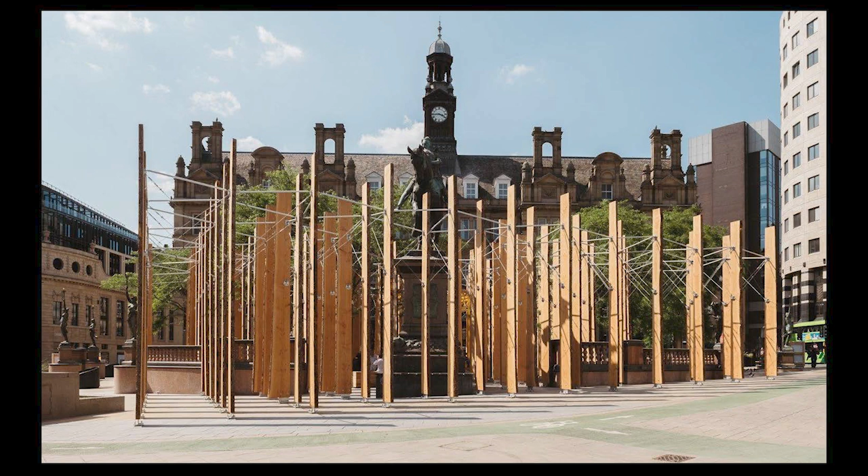This is called Making a Stand. It was in Leeds city centre for the Capital of Culture, I think. And you can tell I'm not working on the Studio Bark side of the business. But this is all about timber sourcing and traceability. All of the pieces of timber you see here are actually destined for another project - they're going to be beams in a restored warehouse in Stroud. Rather than just building an exhibition that's then going to go in the skip, because let's face it, that's what happens to a lot of exhibitions, this was designing a structure with a second use in mind.

So rather than it being recyclable, it's like, here's where it's going to be recycled. That was all about material passporting and how you can track the use of timber.

Another thing that was really important to us when we started Studio Bark is that we were actually going to be physically involved in the structures that we created. So we also set up Studio Bark Projects, which is a construction company.

Although as an architect you obviously have to go through 7 years training and get ARB qualified, we realised that to set up a construction firm, all we needed was a white transit van and some tools. So it was pretty much that, and some insurance. We got contractors all risks insurance.

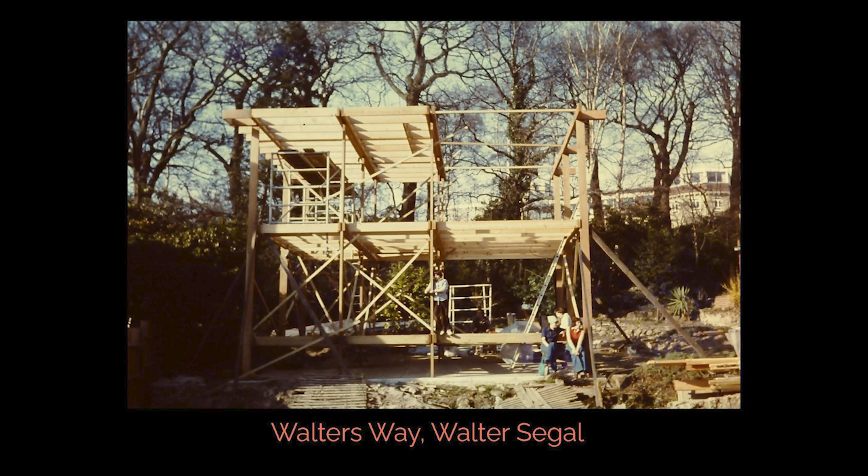The idea behind U-Build is a self-build modular construction system for the circular economy. By that, what we were really focused on at the time was construction waste. We saw so many projects where you get huge skips at the end, single-use materials, plaster, concrete, metal, all going in the skip, and we wanted to change that.

So we were inspired by self-builders. This is Walter Segal, who many of you will be familiar with. This is a project in Lewisham where he used standard pieces of timber and encouraged people to self-build. We really liked that approach, but this was of its time - the buildings were very shaky and didn't have much insulation in, as those who love them fondly would tell you.

So we wanted to take the spirit of this, using materials that were available, but updating it for the 21st century. Here you see the standard 8 by 4 foot sheets of plywood that you can still get, 1220 by 2440 in metric. Although that's a really annoying measurement, for us it's actually really helpful because we wanted to create metric size boards.

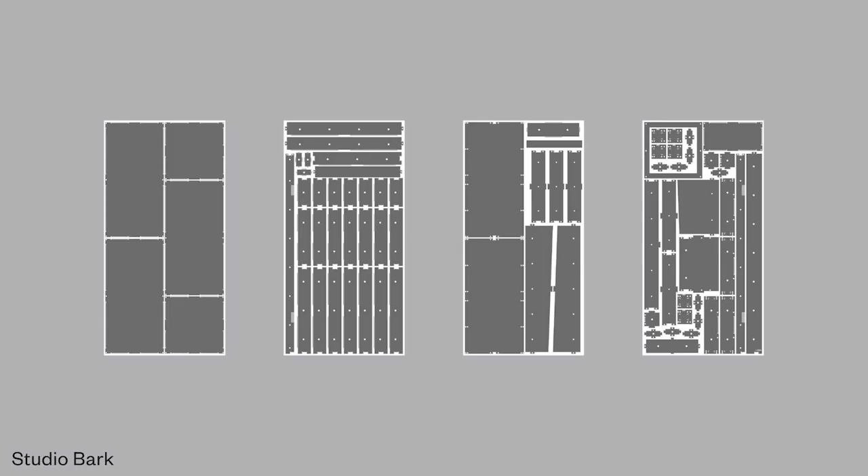So on the left hand side, we've got panels which are, for example, 600 by 1200, so you can fit 2 of them on a sheet with room for a cutter to go around the edge. So the imperial-metric weird UK overlap actually worked for us really well. We can get really high material efficiency on these boards, and we can produce them again and again.

So here's the U-Build process in a nutshell. You get the flat panels that you've just seen cut on a CNC machine. You then assemble them to form those boxes. Once the boxes have been assembled and screwed together, they're then bolted.

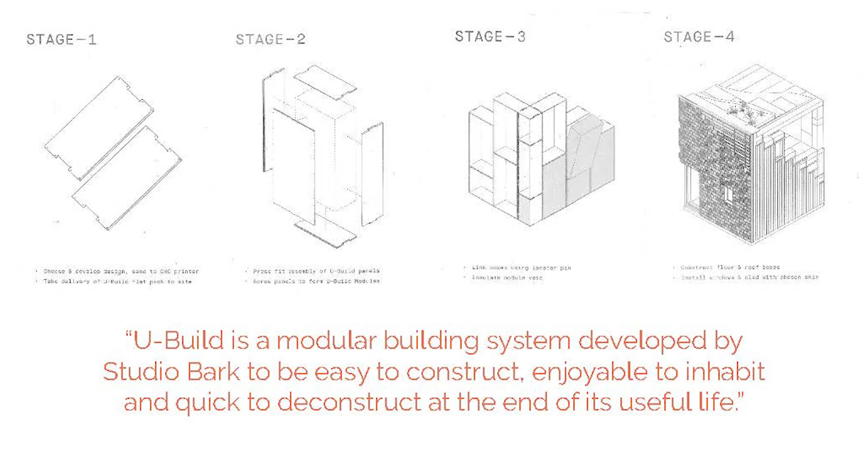And the bolting process can happen again and again, so you can take them apart and reassemble them. We put insulation in, usually sheep wool or wood fibre, and then you can clad it with any sort of material, like concrete tiles, although we wouldn't do that again because it took far too long. Or generally timber, which is obviously sustainable.

So you can kind of see the process again here, this is with the CNC components. We produce panels like this, or drawings like this, for all of our projects as well, so you can see step by step what needs to happen and which pieces need to go together.

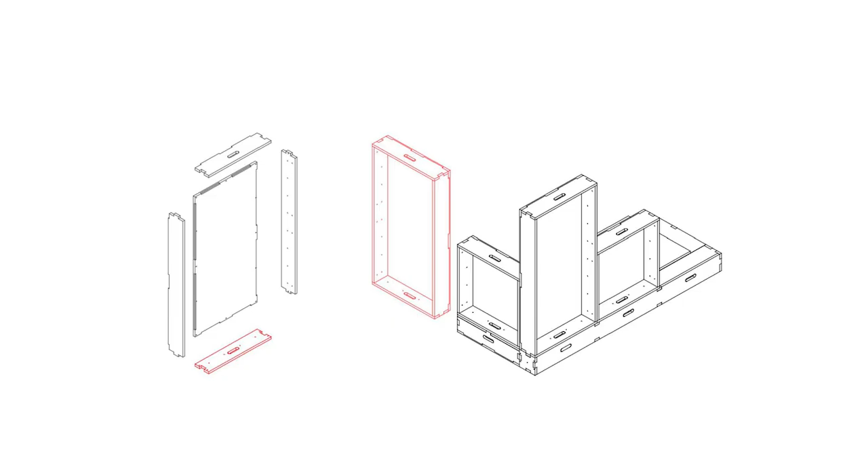And what this means is that it goes from being a construction site to an assembly site. And if you can follow an IKEA sort of catalogue or installation manual, which not everyone can, then you've got a good start at building a U-Build building.

So from that, you can see that we create these sort of interactive components on our website, so you can change and configure the size of your pods, and basically from that you should be able to rebuild your building again and again.

So you could start off with some components that would make a small shed. Whether you would actually do this, no one has yet, but you could say, 'I've built my shed, but now I want to upgrade it into a full house.'

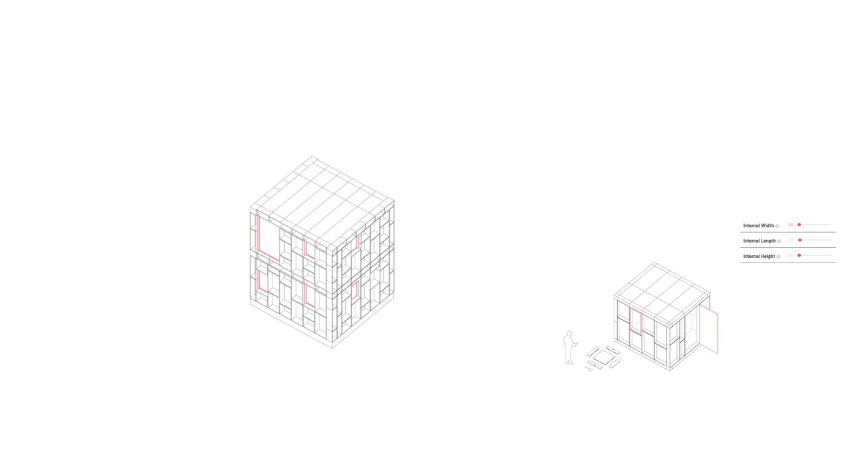What we have had, however, is people come back. So yesterday I was at a project like this, where we had a single-story extension, or a single-story building, and they built an extension on top of it. So we came back to the same project 7 years later, took the parts down, and then built it up again. That's quite fun.

So obviously circular economy is now a buzzword. When we started this was more about just reducing waste, but it's the same thing. So rather than designing, we're not really designing anymore, we're just configuring a system that already exists. That reduces a lot of upfront time. Then we assemble, disassemble, and reconfigure, and it goes round and round. So once the parts are there, they're there forever.

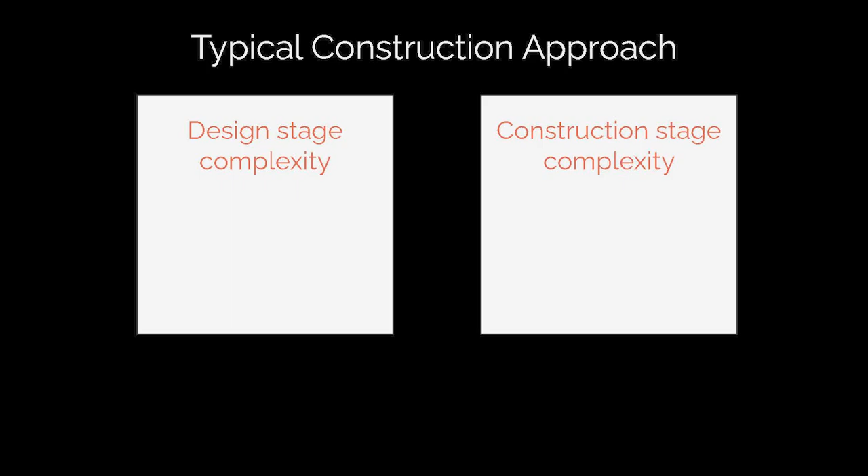So the way that in a typical architectural construction system, you might have a lot of design stage complexity and construction stage complexity. When you've finished your work as a designer, you then give it to the contractor, and they've still got quite a lot of figuring out to do, like 'okay, that's great, but how are we actually going to build that?' Whereas what we've done is we've done a lot of extra work, and some of that is now baked into the system.

We then do more schedules, working out and giving all of the pieces such that on site, the builders really don't have to do very much. And that means the bar is lower and it's more inclusive. So we can have people on site who've never picked up a drill or a mallet before, and frequently we act like facilitators rather than lead contractors.

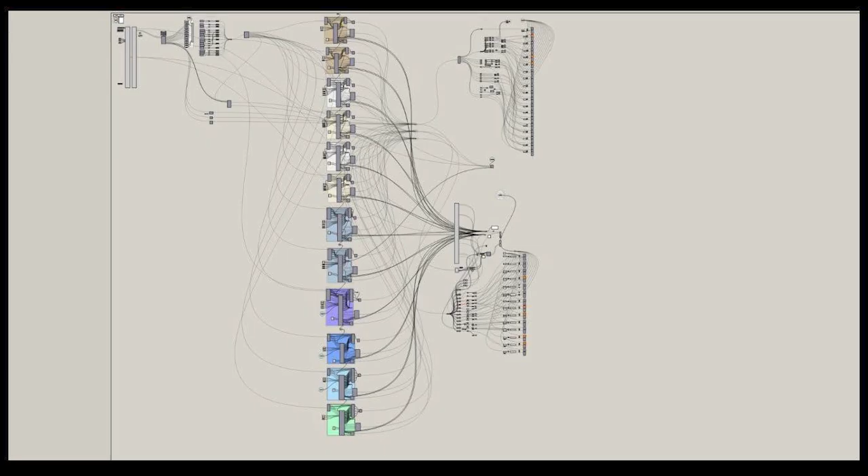So imagine that on the left-hand side, what we're putting into the software is the internal walls of this building. If we drew this shape of the building we're in into the software, it would calculate how to turn that into boxes, schedules, parts, and numbers of screws, and then all of that can get sent to the machine for cutting.

So this is the kind of output that you might get. This is the house that I was talking about, which had its extension put on. You can just about see here, that's where the flat roof was, and it now comes up like this, as of 7 o'clock yesterday evening.

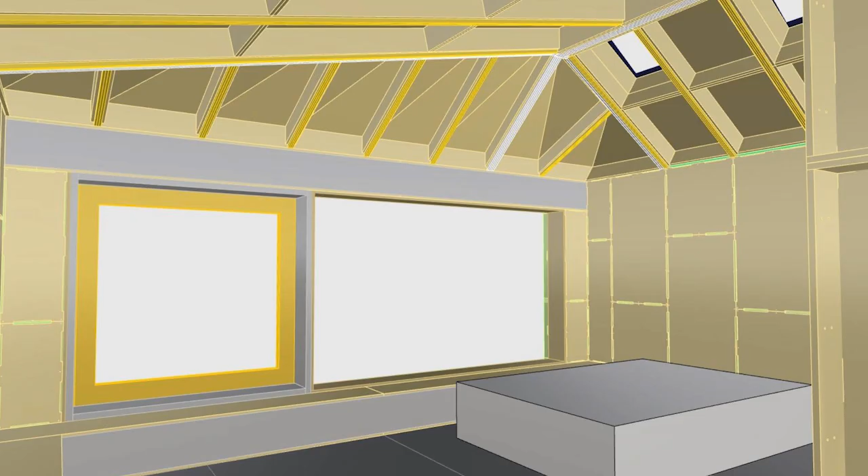We also do more bespoke stuff. This is a fun one, an extension to a Georgian house. We start off with a process like this, a very basic kind of Rhino render of it, and then this is what it looks like—this is actually an actual photograph of it.

So we can plan something out, even though the render's not great—I'm sure you can do better renders than this—but we can get something which is pretty accurate, although we didn't put the cushions and stuff in, so terrible interior designer.

Anyway, here's a range of things that the U-Build system has been used for. Starting on the smallest scale, garden rooms maybe isn't the most exciting thing, but actually this proved to be really important for us.

We set U-Build up as its own thing in December 2019, and then a couple of months later, what happened? COVID pandemic, and everyone wanted garden rooms. This formed a really good baseline of work for us to produce these systems. It was about the right level of project for someone to do in their own time—you could do this, a couple of you, in isolation during COVID in your own garden. So it was a good way for us to test the system before we tried to do much else with it.

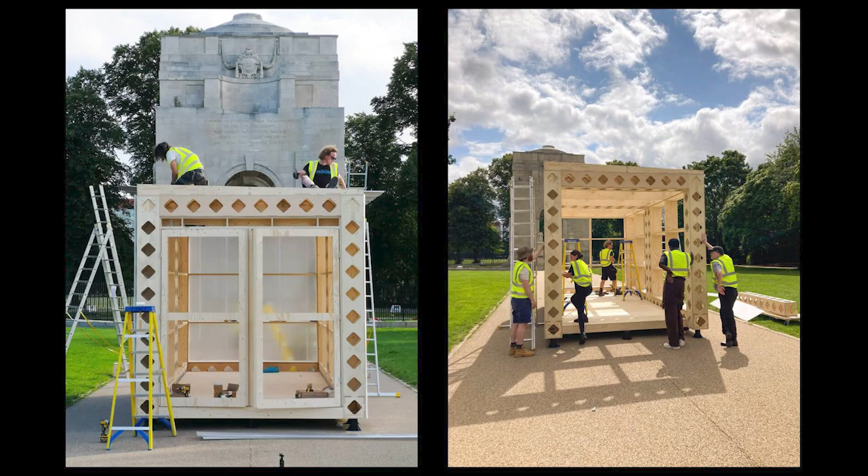Here's a little look at the inside, and one of the nice things is that U-Build is structural but can also be used for anything—it can be made into seating, worktops, furniture, you name it. Obviously this is a very simple palette of materials, but for a cabin maybe that's all right. Other materials are available other than the WISA spruce ply, which is what we use for our stuff.

We also do some fun things like this. This is for a company called Boundless Theatre, really cool people, you should check them out. They have a great ethos with a kind of job sharing, where senior theatre directors share their job with an 18 to 25-year-old. They wanted to build some pop-up spaces to tour around the UK, so they set us a brief to make what they called a boundless box, which you can put up in a day with people who've had no experience building before. That was a fun prototype to do with them.

We end up doing a lot of prototypes because people come on our website, see what we do, and say, can you do this? And then we do this. So a lot of the past 5 years has not been really knowing what we were going to do next, and it's quite nice to be reactive in that way.

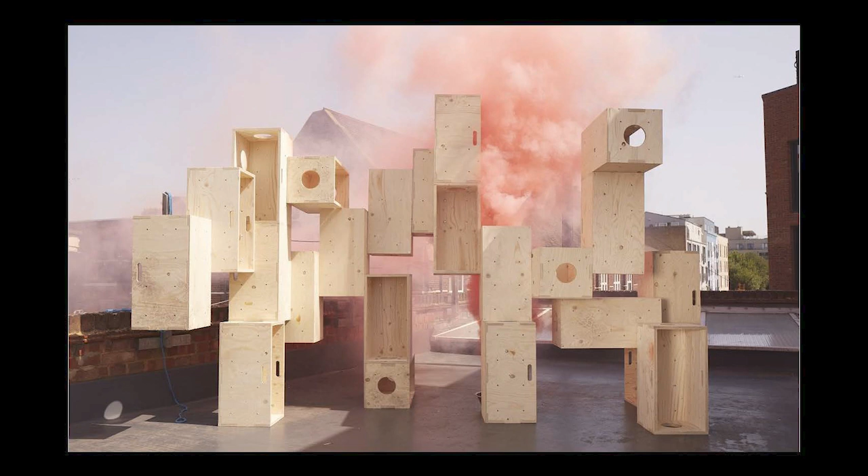Here's also some structures, some sculptures. This was on the roof of our building in Bethnal Green. A photographer came to us and said, hey, I'm doing portraits of all the businesses on the street, do you want to do something? And so we said yes. A few weeks later we were up on the roof and he had these pink smoke canisters. It was a really hot day as well, so everyone got sunburned.

This is a really interesting project, and this is where I was today. This is Sustainable Ventures in County Hall, so it's very central London, just by the London Eye.

We were asked to come up with a system of modular walls that could be installed in this listed building. The interesting brief was that Sustainable Ventures, who are a green tech startup investor, sort of call themselves Europe's largest green tech investment hub, knew they were going to be moving onto the 3rd floor of this building, but then in 2 years they were going to be moving up to the 5th floor. So again, you're getting the pattern here that they wanted to take their walls with them. We came up with a system of doing that back in 2021, and lo and behold, 2 years later, they came back to us and said, can we move those walls? And so we did.

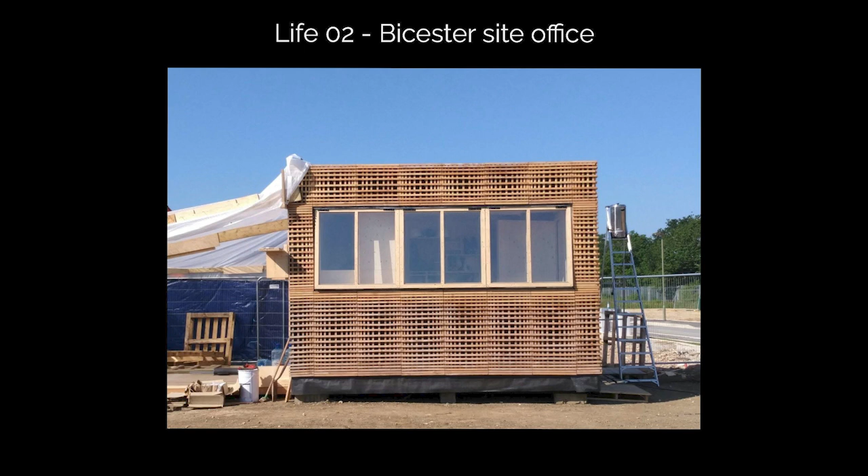After we built it, we found out that they hadn't actually got permission for us to build it there. So there may be a bad professional critique on our part, but we had been assured that it could be built there. Very unfortunately it had to be taken down again, but it was the right building for that to happen. So everything got taken down, moved through that little gate you can see there, and loaded onto a lorry and rebuilt in Bicester, which is the Grand Designs house, Box House that I just showed you.

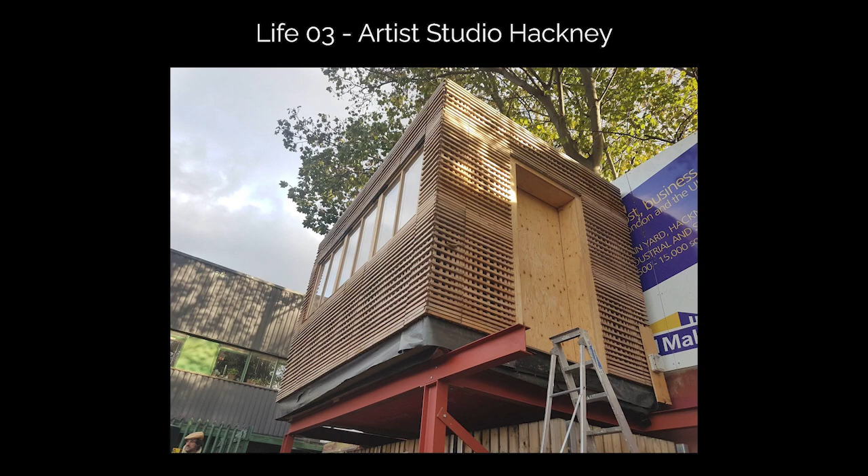So it became the site office, and a number of us actually lived in there for an extended period of time. The thing on the right hand side, the sort of silver tank, we were using that for a shower. That was Second Life.

It then moved to Hackney, to Grow Bar, where it became an artist in residence. There were actually some permanent steps here, so that wasn't the official entry.

It then became the site office for our Nest House project, which I'm going to show you in a little bit. And I'm not going to say finally, but as of a couple of weeks ago, it's in the garden of one of the Studio Bark's sisters in the Chilterns. So it's nice that it's had a few lives, and it will probably outlive me.

So this is another one. Again, there's been a Grand Designs theme. This was Grand Designs Live. They wanted us to build something linked to the show at Grand Designs Live at the Excel Centre.

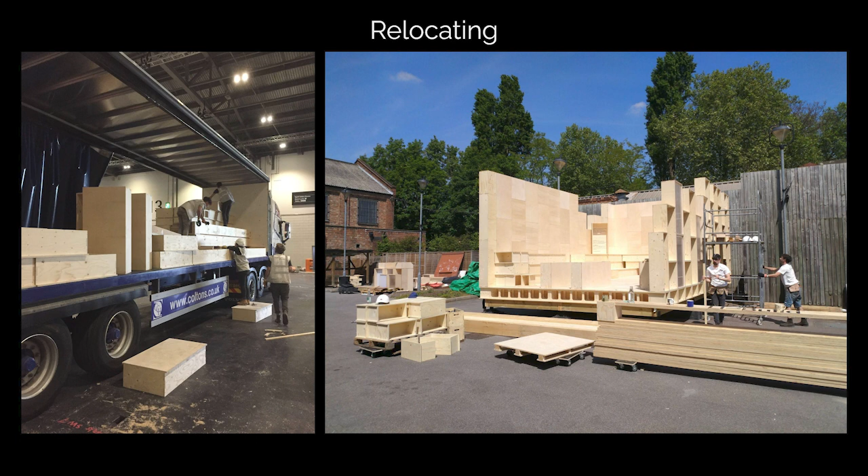And we said, that's cool, we want to build something, but we don't want to make something that's just going to be thrown away. So we partnered this installation with another project we had going on, which was to build a workshop in Hackney Wick. We said, can we just borrow the parts from that project and temporarily build it here?

So then when the show had finished, we stacked everything into a lorry, took it over to the Hackney Wick site, which took a bit of coordinating, but it worked. And then we created this workspace.

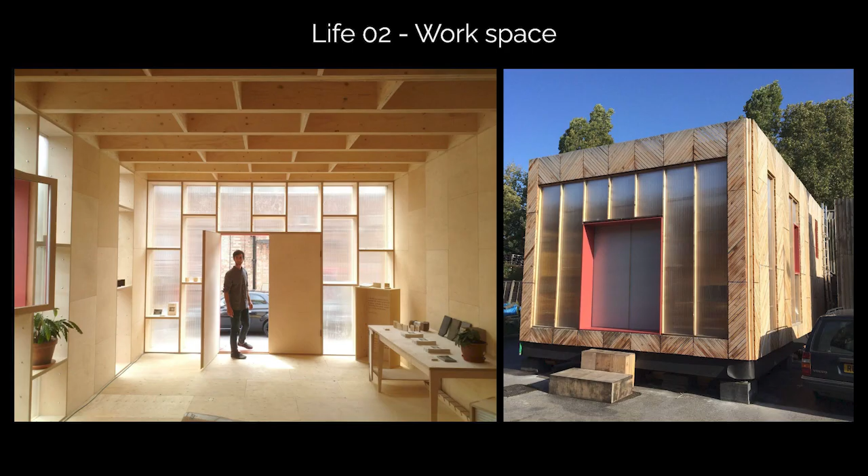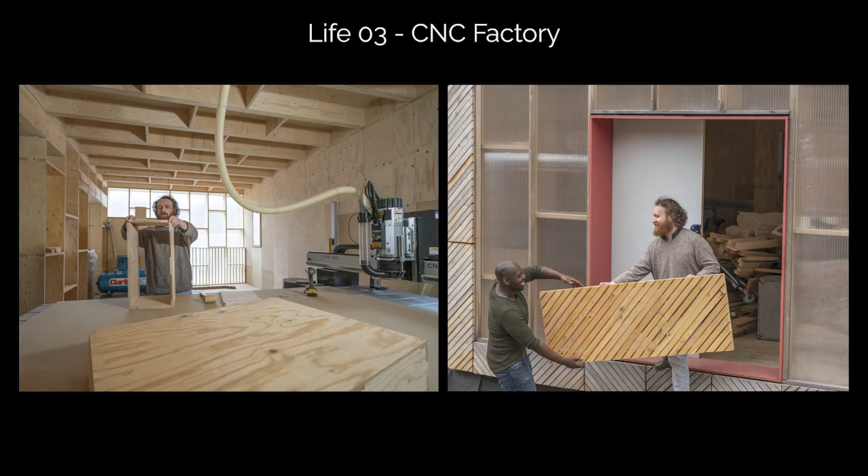But what was nice is that after the workspace was created, Hackney got permission and grant funding to buy a CNC machine, which you'll remember was the thing we used to cut out the panels. So it got its third life as a CNC factory, making more U-Build components.

So we've got this kind of self-replicating monster where you can create it and it can create itself, and it hasn't yet taken over the world, but if you've got AI powering this, then everything would just be covered in CNC factories. And that's some of the cladding you saw on that garden room.

So a little bit more detail as to how all of this works. When we send out a kit to someone, you can see the things that arrive. You have plywood components, which are cut, and you can see on the right here the plywood components and how they're cut, so that they have little tabs which fit into each other.

We send a wall membrane which goes on the outside, and I'll show you some details in a little bit. We've come up with this option for ground support. Rather than having concrete foundations, we let people use compacted gravel, which is quite low embodied carbon, and then these adjustable feet, a bit like you might get on kitchen cabinets, but each one can take a ton. Then we have lots of them, like a little centipede, and the building doesn't need any proper foundation.

So that's a really low carbon solution we found, and they're made of recycled plastic. So we're making a bit of a compromise there, but it's good to have stuff that's very close to the ground not rot as well.

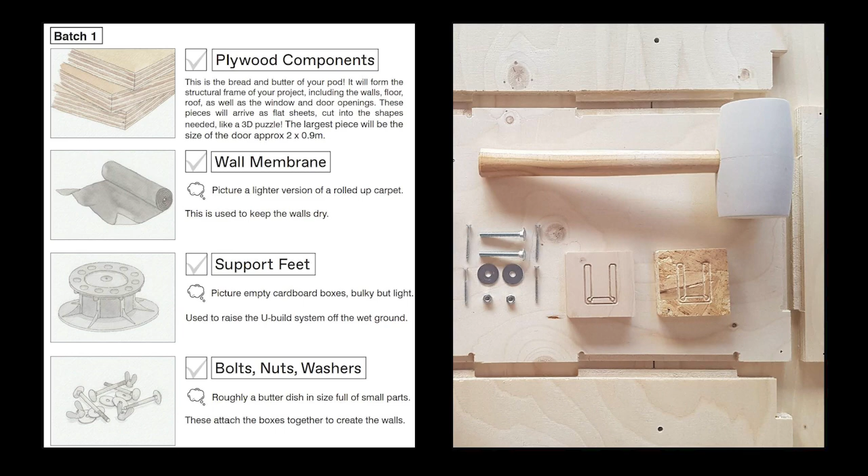And obviously the bolts, nuts, washers, you can see a few of them there. The priority with all of these things is that it can be demounted, and you can see them all as well. We show the screws in the visible faces of all our buildings, so nothing gets covered up. There's no glues. This is some of the finessing that we've done around the detailing. Our boxes, we want them to be airtight, or as airtight as possible, so that we don't get leakage and humid air going into the construction system.

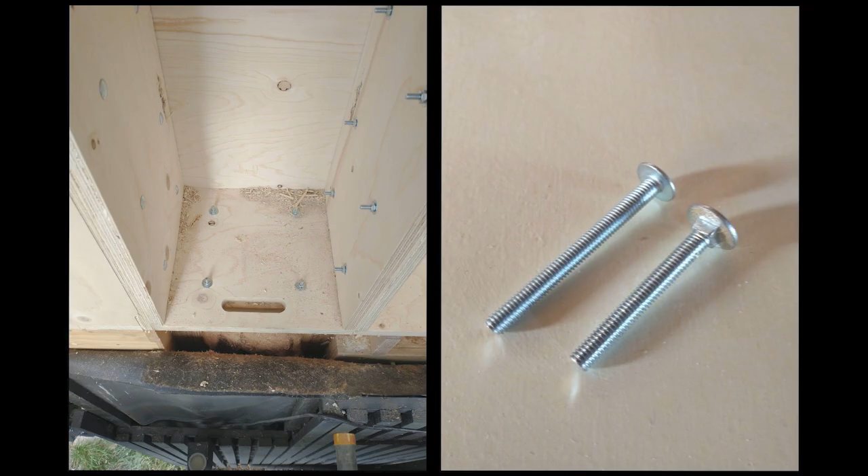You can see here, after the building, the boxes have been built together like that, so they all lock together. You then put the screws in. We have pre-drilled screws, and they're all at regular intervals. The boxes are then bolted - we use coach bolts, and we either use nuts and washers or wing nuts, depending on whether it needs to be installed with tools or without tools. By putting these at regular intervals, like at 150 centres, you can move them along, and one piece will connect with another piece wherever you move it.

So just to go into another detail of an actual house that's been made with this - it's called Nest House. What was interesting is this was an opportunity for us to incorporate some of the things we'd done from Studio Bark, like the Studio Bark project, working with students, these live builds, and also with a test U-build home.

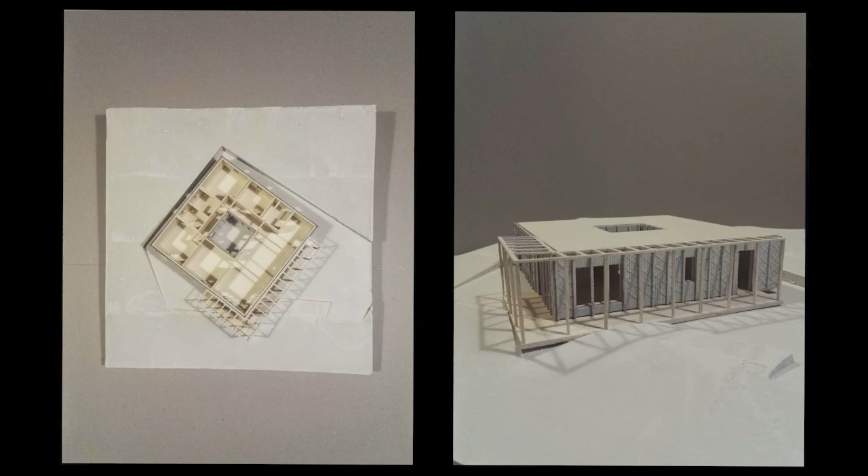This was a brief for a retired couple, both of whom had disabilities - one had Alzheimer's, and the other was in a wheelchair. They wanted, and got planning for, with Studio Bark, this single-story house which was all very accessible and easy to manage. It was also designed to be a direct current house, powered by solar panels, so rather than AC power like we usually have in the plugs, everything would come directly from that and from the batteries. Again, this was part of the innovation strategy for making the house more efficient.

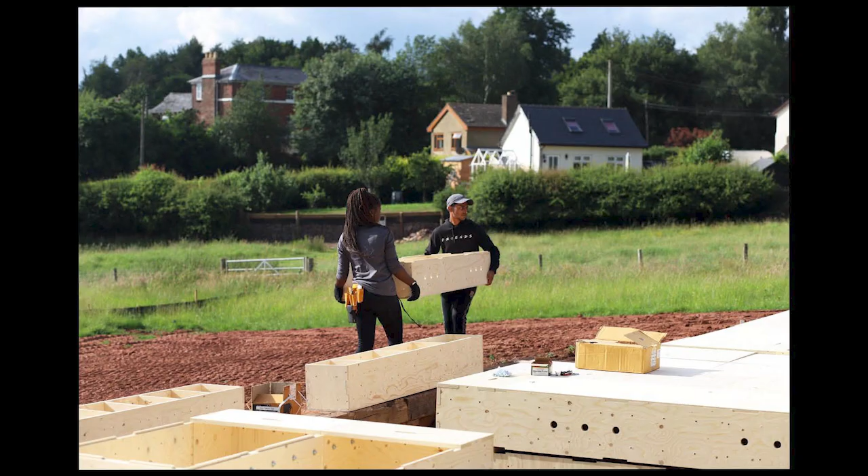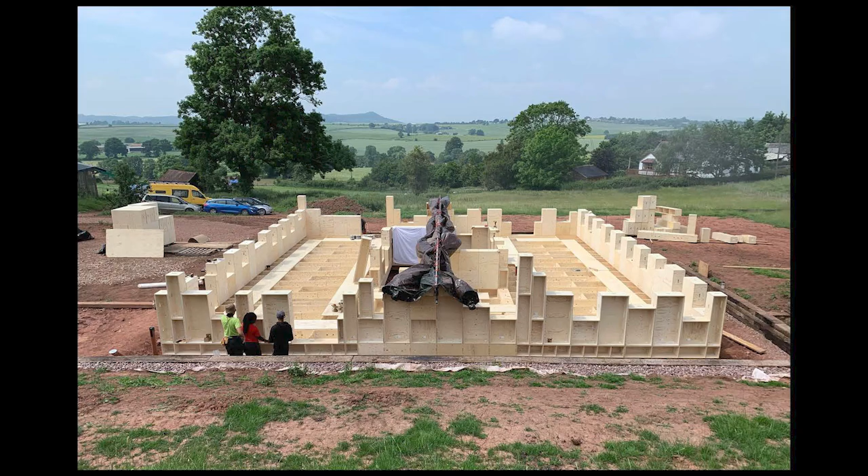So we're lifting them up above the ground. Here's some of the students who participated in the workshop. They were installing some of the boxes, and you can see the holes that have been drilled for the services to go through.

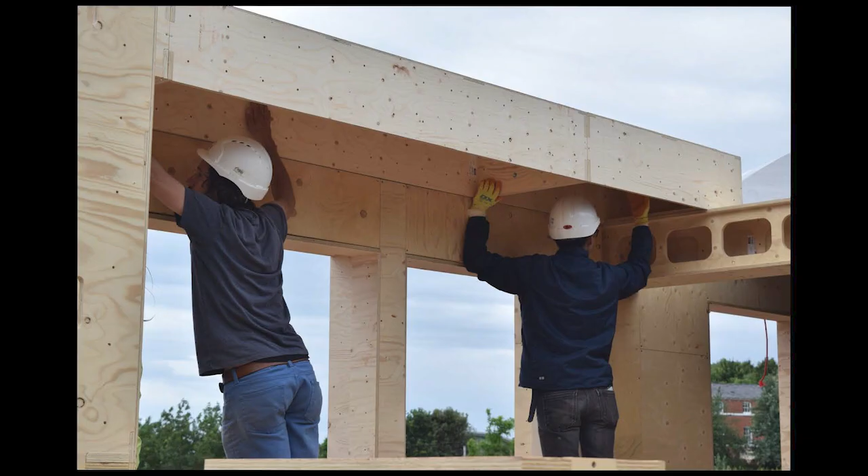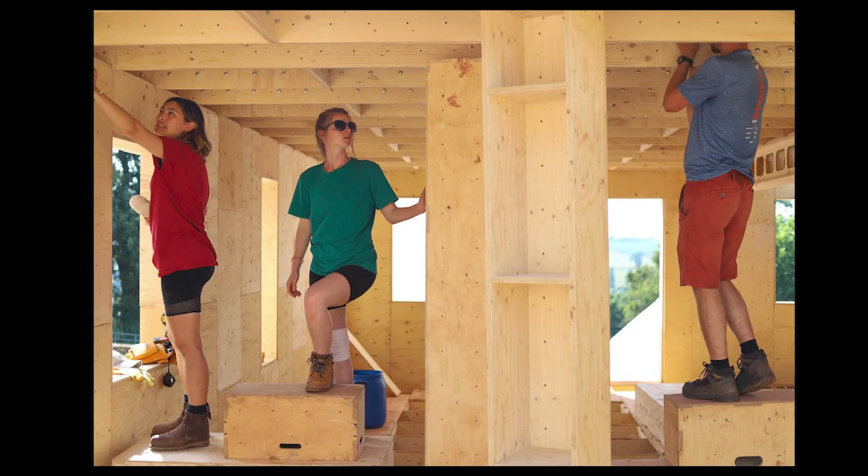Again, you can see here how the boxes are fitted in, and one of the interesting things is we've created this brick bond, like you get bricks in a wall. We've done the same with the roof so that we can use 2.4 length pieces of plywood to span longer lengths - that's through the Structure Workshop, the structural engineer we work with. You can see the roof's being bolted together, and those bolts are going to be visible in the end build, so we're trying to be honest about what we're doing.

Here's the students. It was really nice to have a diverse group from different backgrounds, all working together. The idea was that they were sponsored to be there, and they also got lots of training from people like Trada.

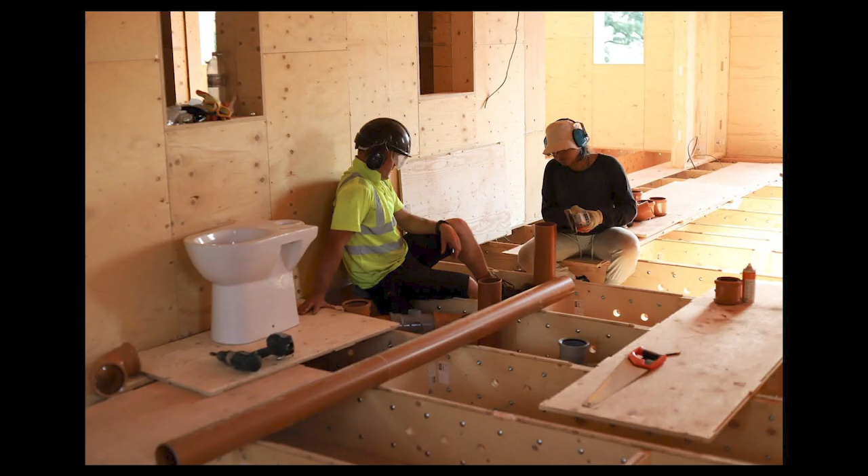We had RIBA coming down, giving them some context to what they were doing. They learned to install services - that's actually one of the things that's really quite hard to do. We never pre-machine holes for the bigger services, because people always change their mind on site, so you get holes where you don't need them.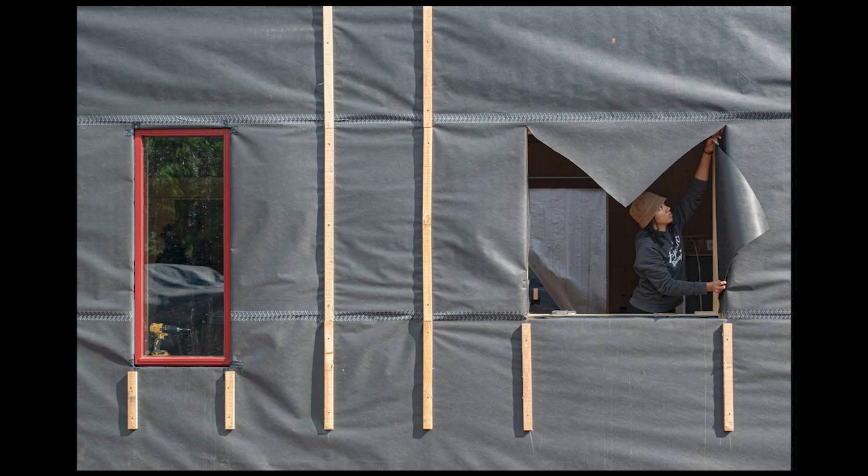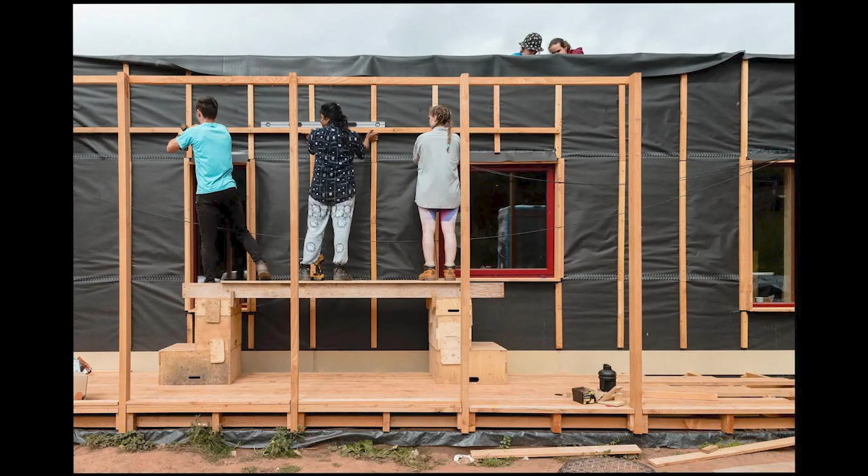So you can see here the membrane I was talking about being installed, which protects the building from the weather before the cladding goes on. This is the cladding and battens being installed, and the green roof on top of the building. And then that's the final look of it, with the clients sitting out and enjoying it.

So it's all Western red cedar, cut in a local workshop in Hereford, around the corner. You get this really nice dappled light. You can just about see the solar panels at the top, which are shading the windows but also providing power for the building.

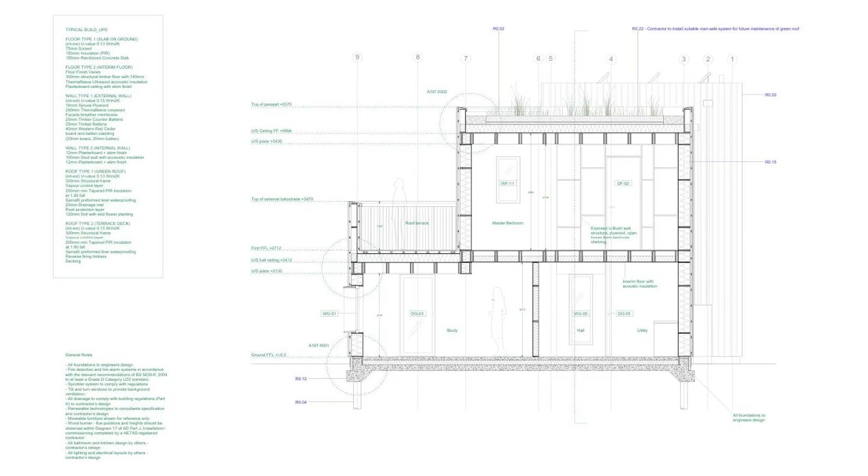So jumping into some of the details - I've explained a little bit before, this is another U-build house. You can see the sort of details that we produce.

Looking at the wall build-up for a full-on house, we have 18mm plywood on the inside, which acts as our vapor barrier because the boxes can be airtight, so it's unusual - usually people put another layer of plasterboard on top, but plasterboard is single-use. So we then fill it with sheep wool or wood fibre insulation, so when you're working on site, you don't get all that itchy glass fibre stuff.

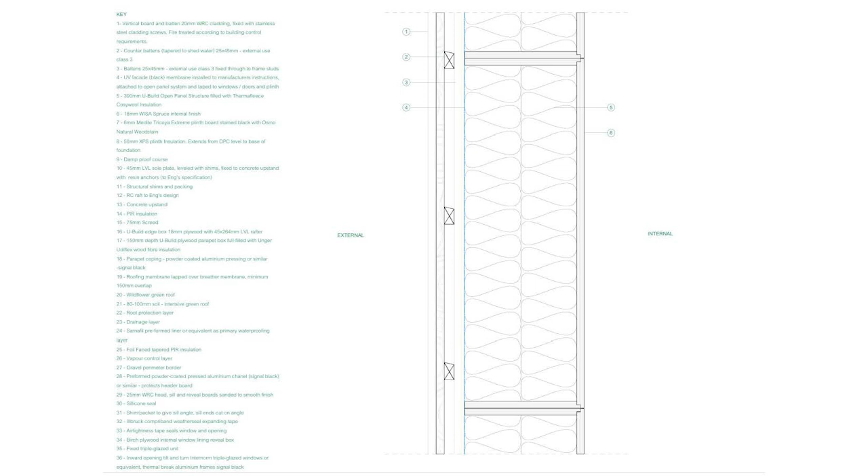We then have the black membrane, shown as blue here, that you saw just being wrapped. Then the vertical battens, counter battens, and the cladding on the outside. So it's quite a simple structure, but that's sufficient to get you to 0.15, which is like passive house levels of wall U value if you're going for that.

You can see the same kind of idea for the roof, but we usually have a fall in our boxes so that we can use natural insulation on the roof. And then we use a butyl pond liner as our membrane on top, which is then weighted with the green roof substrate. So the idea is that all of these materials can be taken off and moved if you ever wanted to.

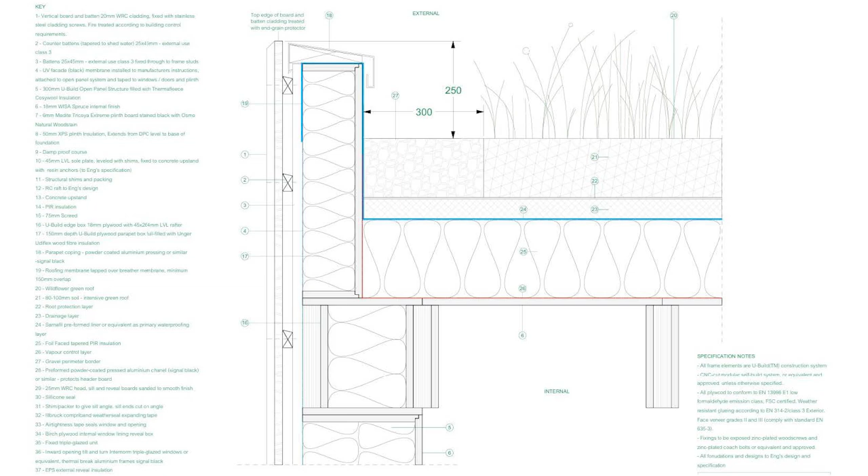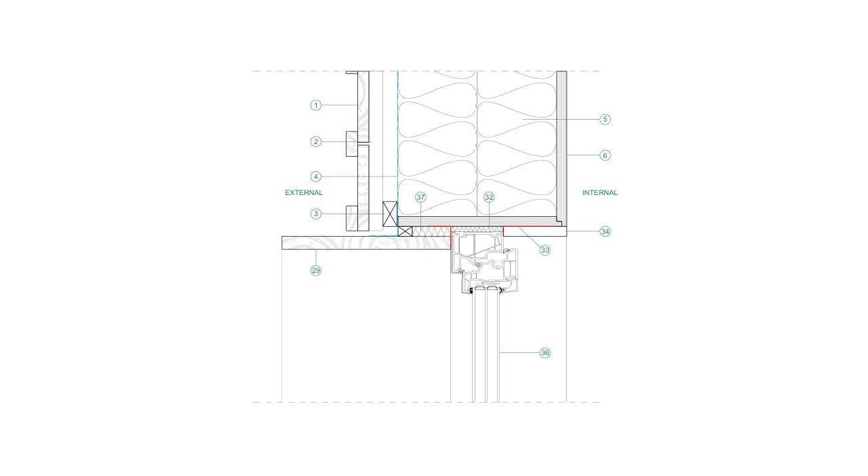Typically, when someone's building a house, they don't take it down, but they do stuff like extend it upwards, like we've seen already. This is the windows going in. So again, a very similar process, but we tape the windows to the boxes, and that's probably the most non-reversible thing. If you have to take a window out, you have to cut the tape.

We've looked at another system, but I won't get into that now because I've only got probably 20 or so minutes left.

So I think this is maybe where the talk takes a little bit of a left turn, because imagine we've set this practice up. We've been interested in doing the right thing. We all kind of knew about climate change, and we studied under tutors who were very passionate about the environment. So when we set up Studio Bark, we really were trying to push the boundary in terms of how we create environmental architecture through what we were specifying.

Around 2018, there was the IPCC report saying that we only had like 12 years left to properly change what we're doing as a society before we create these disastrous climate tipping points. And we looked at what we were doing and we were like, look, this is good, but are we really doing stuff quickly enough? If we make some nice buildings, what's going to happen if the world collapses, but we've got these really nice buildings?

And so we saw what was happening in the environmental movement. We saw Greta Thunberg, we saw Extinction Rebellion, we saw people who were suddenly saying, you can't just be sustainable anymore, this is an emergency. So we had to think about what we could do as architects to try and support that.

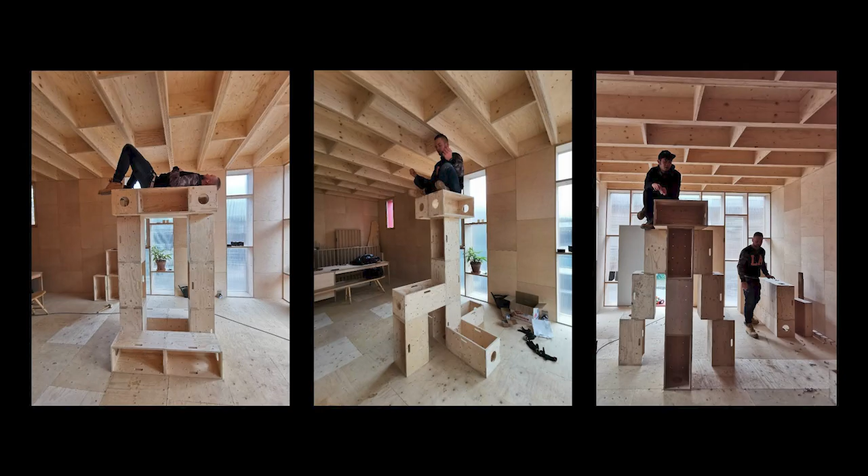We open sourced our design, gave it to Extinction Rebellion for them to do what they wanted to. And nonetheless, we also thought it would be interesting to run a workshop with some students for some hypothetical structures that people could build to elevate themselves above a crowd.

And that's because we learned that there's a very interesting point above 2 meters in height: a police officer is not able to pull someone down from a protest structure without specialist lifting equipment. So we thought it would be very interesting to design hypothetical structures for protesters to be able to place themselves safely above this level.

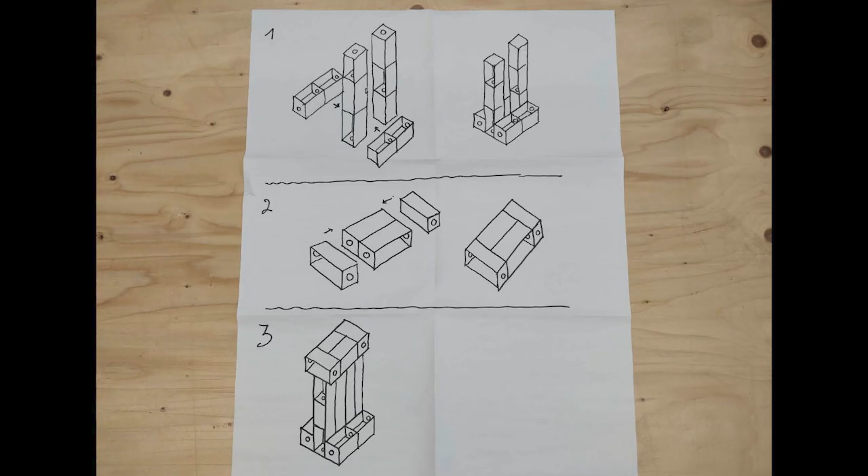So the students were given the brief to take these flat pack boxes and work out the most comfortable structure that could be safely built with the minimum number of boxes. And they did this really rigorously, and they actually ended up getting a RIBA prize for the project. They did structural bending analysis, they did health and safety risk assessments, looking at how you could create these hypothetical structures. Obviously hypothetical, in that the students were not involved in any protests. They were only talking about this in an academic context.

So they produced these kind of sketch ideas for how these could be brought together.

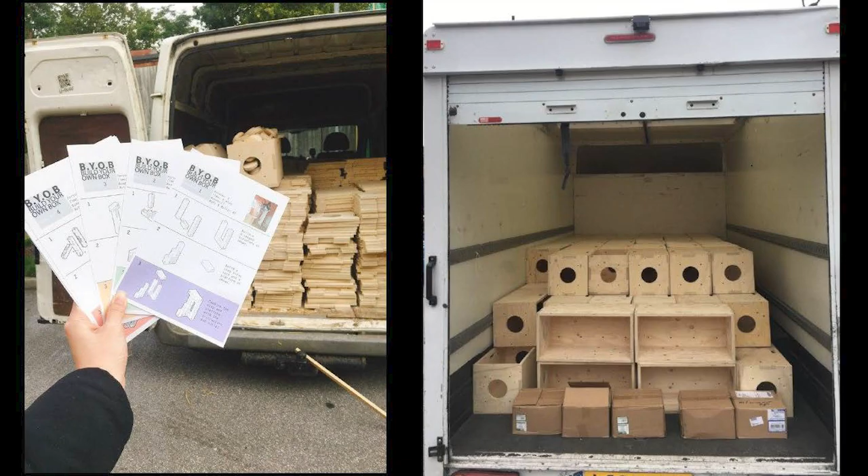Simultaneously, Extinction Rebellion, who we'd open sourced the design to, decided they wanted to use these boxes. They did a big crowdfunder and raised enough money to create 600 of them, which were cut and assembled by community groups who donated time, because there was a lot of goodwill towards XR at that time, including instruction manuals for how to assemble them. A number of them found their way into Trafalgar Square for the October Rebellion in 2019.

Groups were assembling structures that ended up looking very similar to the hypothetical designs the students came up with. Obviously, no one knows exactly how that happened.

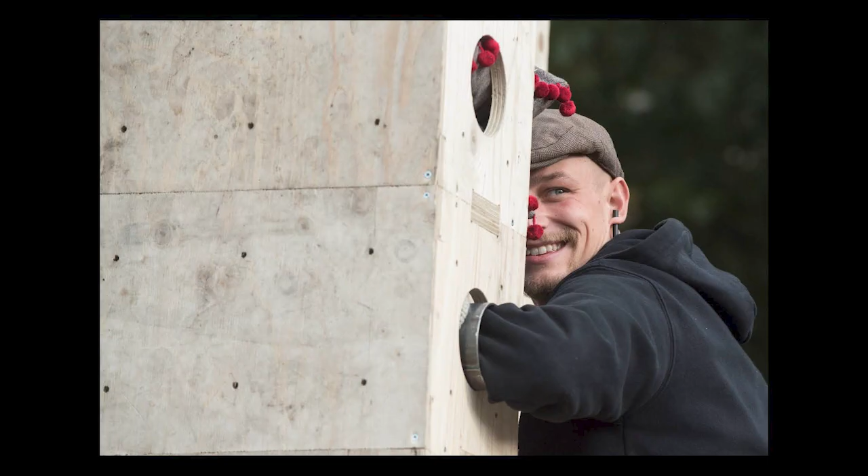I'll speed up slightly. This is a really interesting design feature - the person there looking very happy with himself has got his arm in a lock-on tube, a metal tube which can connect two protesters together. If you connect that into the structure of a building, the person can't be taken out because they've got their hand connected into the structure.

So you've made this really interesting puzzle to be taken apart by a state official. Part of the design brief of protest architecture is to create a structure which people can occupy space with, which nonetheless can't be removed easily.

Obviously, this is non-violent - everyone is sitting there peacefully, and it's a continuation of trends like the suffragettes chaining themselves to railings. It's a modern day equivalent of that.

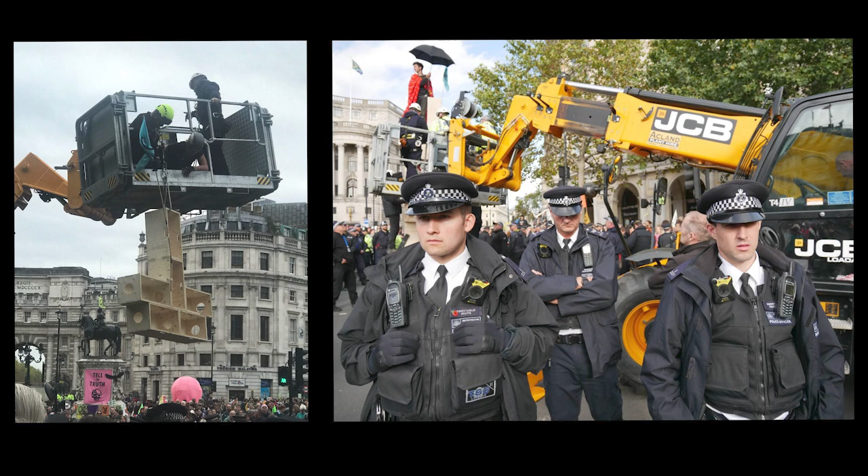It happened that on the 10th of October 2019, I found myself standing on top of a tower in Trafalgar Square, and was subsequently arrested, guilty only of obstructing the highway, a minor traffic infringement. Some of the laws have now changed - if I did that again, I'd probably be in jail. So I'm certainly not advocating that people do this, but it was an interesting and perhaps silly thing to have done.

Nonetheless, what it did lead to was a book with the RIBA - hooray! There was me thinking it might impact my architectural career negatively.

What it did give me was a platform to talk about activism and how we need to push things forward. I think the important thing is that we all recognise we need to be doing things faster. And the book was also in 4 colours, which was quite nice.

Following that, I got the bug for writing, and decided that this topic we mentioned, protest architecture, I was really interested in - like, how architecture can be used to support movements around the world that are trying to make things better.